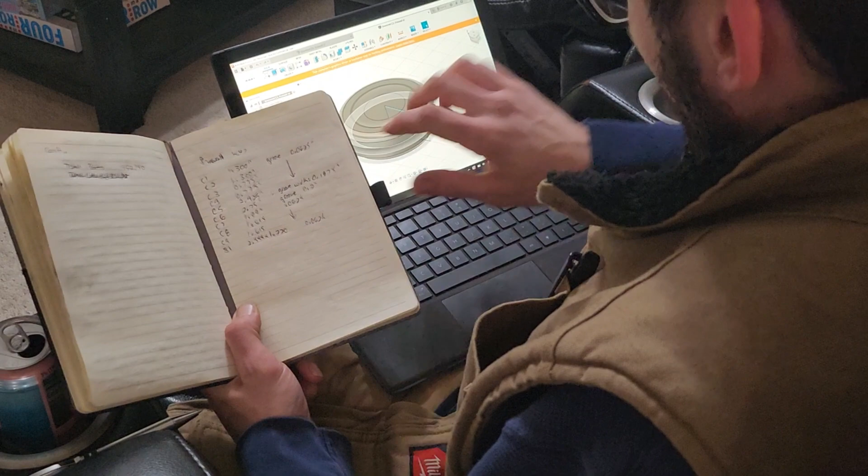So using our notebook here with all of our measurements of all of our circles and slots in the firewall, I fired up Fusion 360 and designed myself a couple of grommets. This one in particular is C3. I tried to design it so that the sketch had only one dimension that I needed to modify to make every single one of my different grommets. So 0.775, 0.775. And I made a whole bunch of those.

So now I'm going to make the slots. There's 2 of these slots, this 1 and 2, same thing. I'll show you how I go about modeling that all the way through.

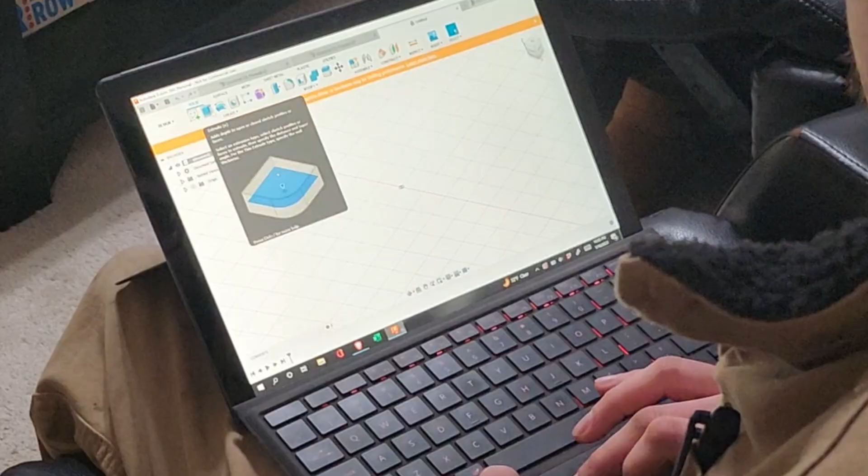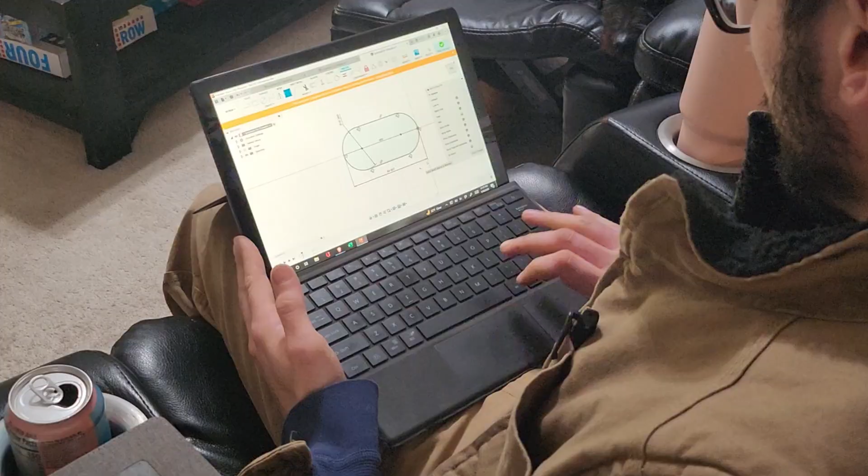Well, of course my camera battery died, because of course it would. So at least now I get to take you through how I designed this slot grommet from start to finish. First thing I did was create just a slot sketch using the dimensions that we took down in the garage, overall length and width. It's a tangent, 2 tangent circles, so easy enough for the computer to interpolate that.

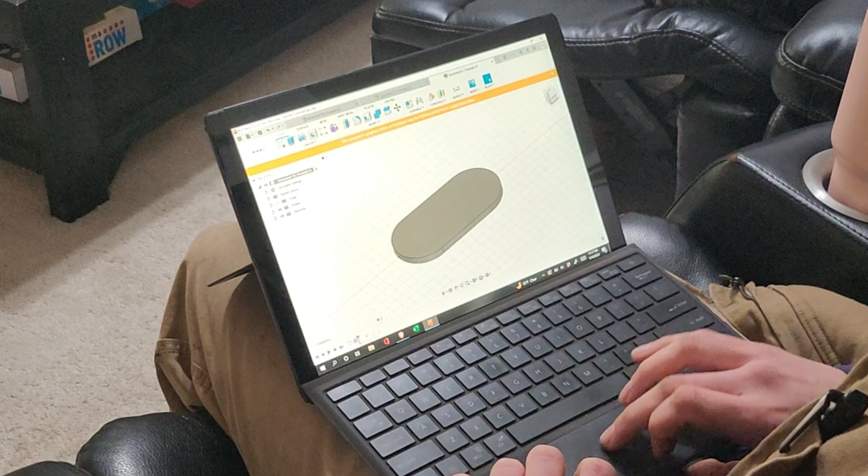And from there I extruded this. Let's finish this sketch. Move this guy up. I extruded that whole thing as one slice, mid-plane extrusion for you SolidWorks guys, symmetrically in Fusion 360, up the width that I wanted the inside slot of my grommet to be.

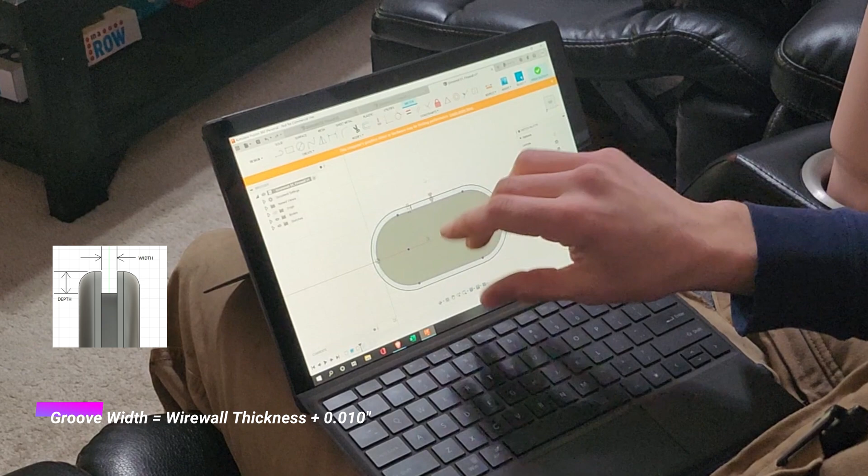Another sketch on top of that plane. Projected this whole feature, offset it - the depth of the slot that I wanted, I forget what I chose there. Offset that line, finished that sketch.

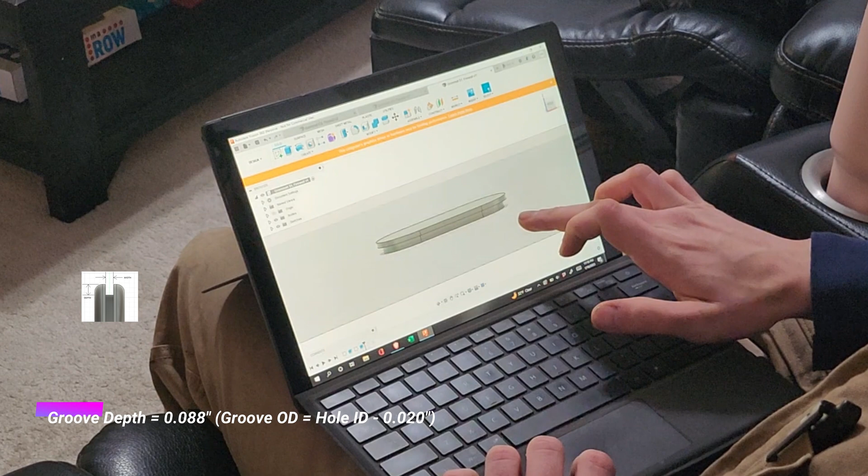Extruded that up one more time to form the top half of that slot. You can kind of see where the plane intersects halfway through. And then another feature on top - I gave that a nice, oops, too far, go back a little bit. Gave that a nice fillet to help tidy it up, also to help with installation.

And then I mirrored both of those features across the original sketch plane. Because I did a mid-plane extrusion and kept this whole thing symmetrical about that one plane - just chose a single datum - I was able to mirror every single feature to create just a symmetrical slot grommet. So this is a very quick way to prototype parts in CAD rather efficiently.

So that you don't have to try to create all of this at once by using a sweep or trying to carve that in as an undercut later. There's a bunch of different ways that you can accomplish this. I think this is pretty simple. If I wanted to get fancy with some stuff on top, I guess I could, but we're good enough for now. I mean, I guess we could take off a little bit of material. Since we're 3D printing this, we'll take a little bit of material off the top as well. Why not? And I'll mirror this again across the top.

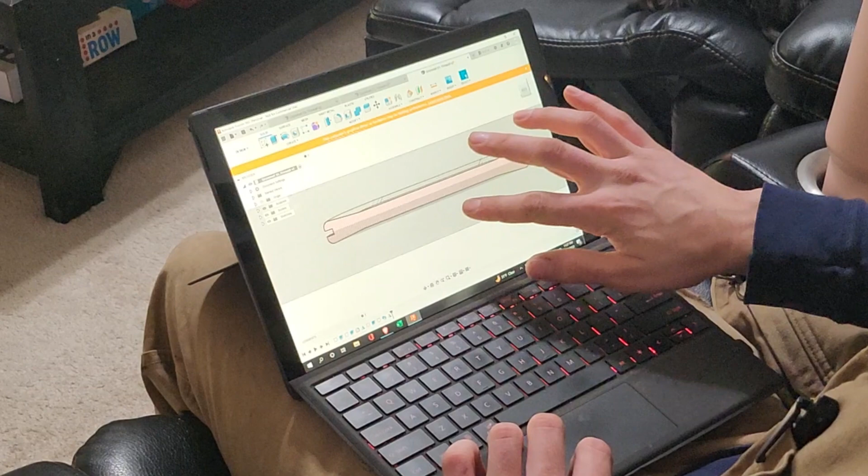Yeah, it didn't like it. That's okay. Is this a little tight? How much should I extrude this? Ooh, we're going. I want this divided by 2. Then we got our cross section. Check our thickness, it's not bad. I like it, I'm gonna ship it.

There we go, we have all of our files here, exported as STLs, and we'll fire up PreForm. I guess we'll create a slicer file ready to go so that we can 3D print these later.

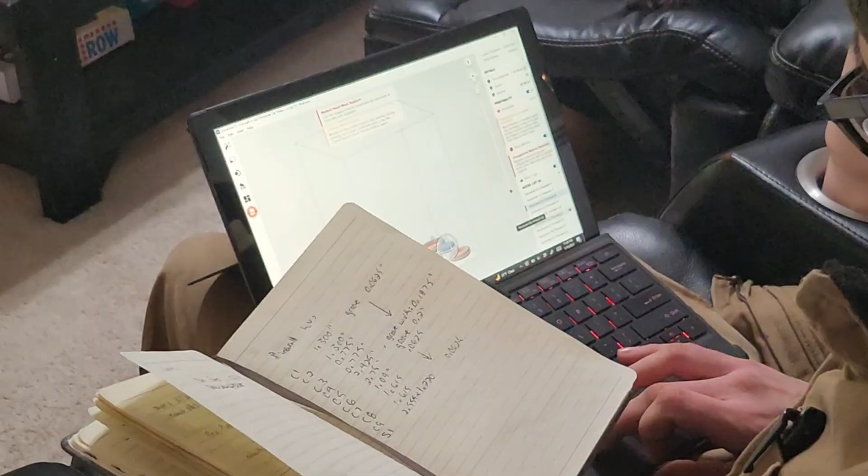See what auto orient all does. Horrible. What? Why would it think this is a good idea? What? Ooh, I should have labeled these. That's okay, I am going to make the slicer do it for me.

We were going to go full raft so that we can have raft labels, because that's very helpful. Turn down the support density just a tad, because you never need 100%, as well as touch point size, because you never need that either. And then you let the little surface that was never designed to do slicing and CAD work chug away, trying to slice a whole bunch of different models at once.

Alright, what do we have going on here? It hates life currently.

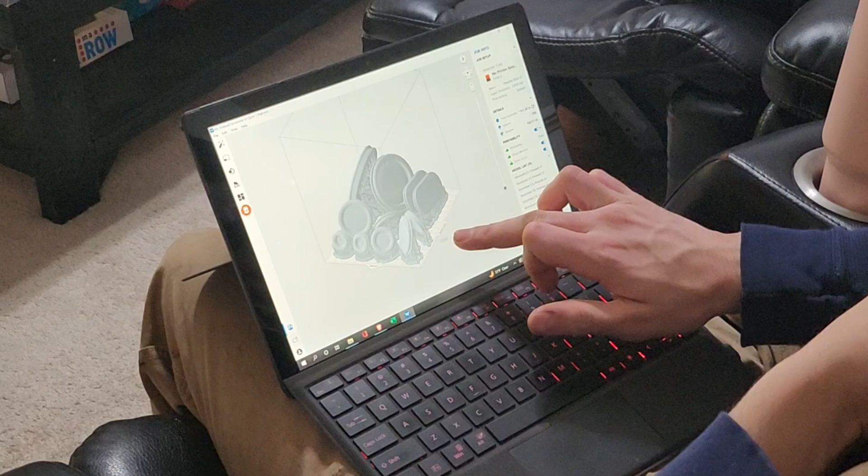Ooh, got them all in, and they're not touching each other. That is awesome, heck yeah. Save that. Kit. Firewall. Grommet V1. Boom, that is nested pretty well as well. You guys see that?

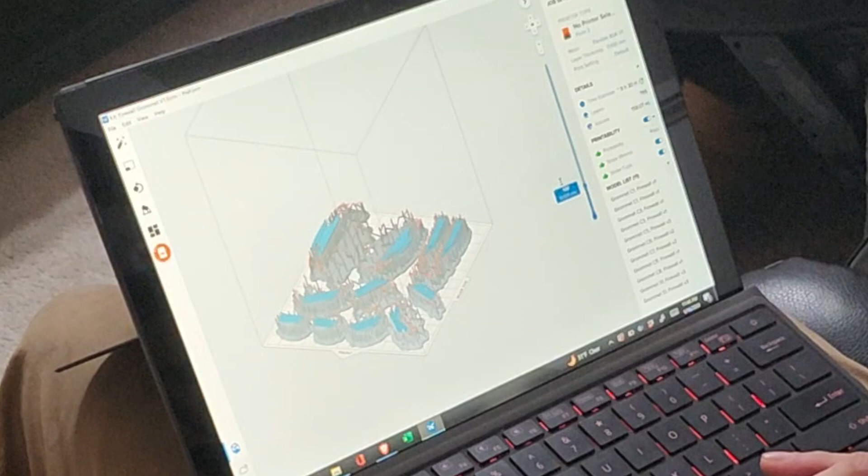Nice, alright. I guess that'll do it.

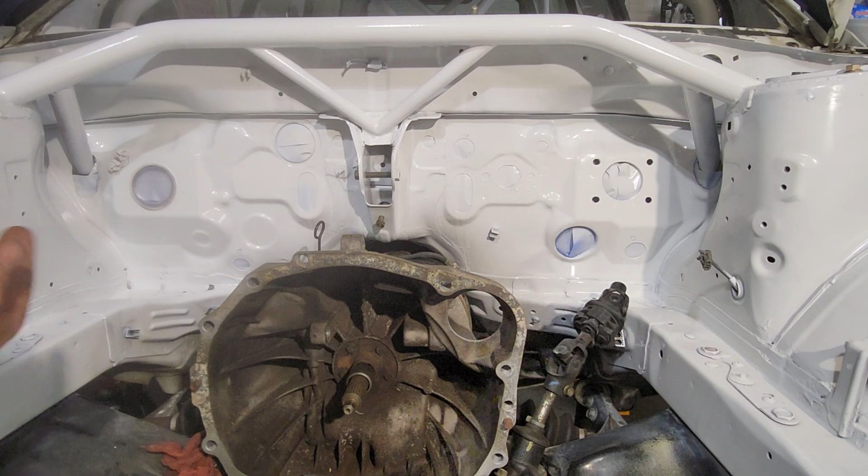It's actually been like a week or two, but I 3D printed all these little grommets out of, forget which material, I'll throw it up there on the screen, I'll figure it out. On the Form 3 that we have at work, we do a lot of prototyping on it and trying to push the capabilities and boundaries and just develop our own skill sets. And part of that is, well, if I am pushing the boundaries and figuring out how to print stuff efficiently, I can maybe sometimes print stuff for me.

So we did have the entire firewall labeled with where these all went, then promptly painted over it. We took pictures of that before I painted over it. These are all, the file names were all labeled correctly. I never embossed or engraved the numbering system on the parts themselves. But we already popped that one in right there. It looks pretty good. We're going to go ahead and pop the rest of them in, hopefully. We're going to at least guess, see which ones go where.

Needed a little technique. Sweet, look at that. Look at that. Awesome. Oh, Matt, you moron. Oh.